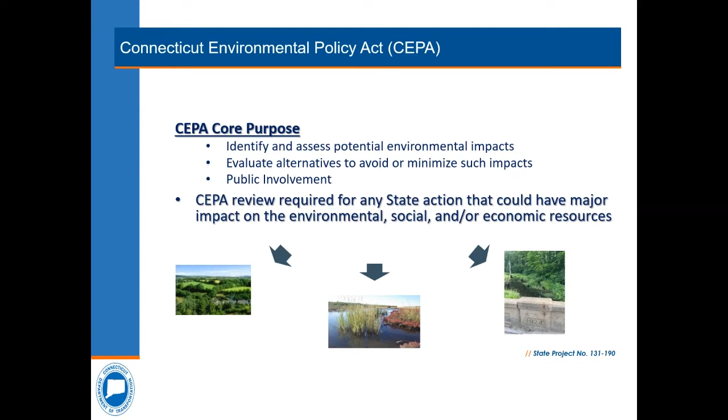Thanks, Jeff. Hi, everybody. Thank you for joining us here tonight. My name is Kevin Fleming, and I'm a transportation planner here at DOT, and I work in the Office of Environmental Planning. We're here tonight for a joint public informational/CEPA scoping meeting. What does that mean exactly? What is CEPA and what is meant by the term scoping?

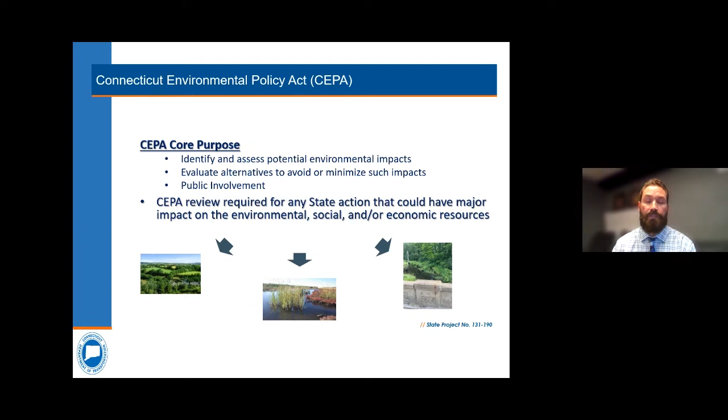Well, the Connecticut Environmental Policy Act, or CEPA, provides a process for Connecticut state agencies to follow in order to identify and review any action that may have a significant effect on the environment. At its core, the purpose of CEPA is to provide a public process to identify and assess the extent to which a proposed state action may affect the environment, and then also to evaluate any alternatives to avoid or minimize those impacts. A really important component of CEPA is the public's opportunity to review a proposed project and give feedback. So your comments and questions here tonight and then throughout the entire public comment period, which expires on June 3rd, is really vital, and it's also a critical part of the CEPA process itself.

So while conducting a review under CEPA, we have to consider the impacts that a project may have on a really wide range of environmental resources. Now, what you see here isn't necessarily an all-encompassing list, but it should give you a really good idea of the range of resources we have to consider under CEPA. Everything from cultural resources to noise to wetlands, and then also we have to make sure that the project complies with the State Plan of Conservation and Development and isn't in conflict with any of the local master plans.

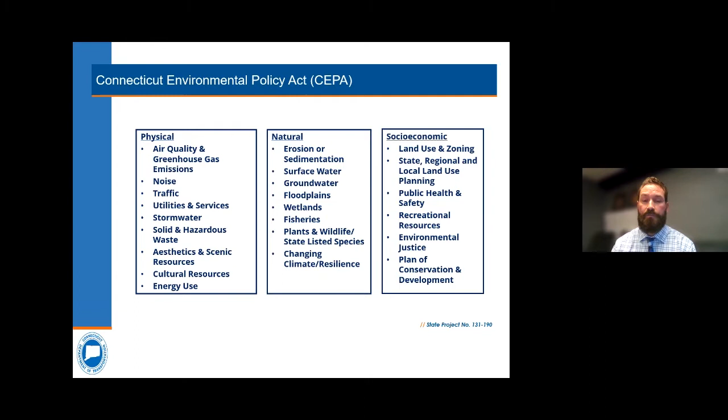And actually, in the case of this particular project, since it involves federal funding, like the majority of our projects do, we also have to look at these resources to ensure compliance with the National Environmental Policy Act, or NEPA, as well.

So now that you have a really general idea of what CEPA is and what needs to be considered under CEPA, what exactly is meant by the term scoping? Well, scoping has a really specific definition under CEPA, and the process involves a defined set of steps for public outreach. CEPA scoping is defined as the gathering and analysis of information that a state agency will use to establish the extent of environmental review of a proposed state project.

So basically, it's just a way for us to get information from the public and other state agencies so we can ultimately determine the proper level of environmental review and documentation needed for a particular project. This process begins once we publish a notice of the project in the Environmental Monitor, and that kicks off a minimum 30-day public comment period.

Now, for those of you who are not familiar with the Environmental Monitor, it is an online publication run by the Connecticut Council on Environmental Quality, and it basically tracks the projects that are required to go through the CEPA process and posts the relevant information for those projects. For this particular project, we published that notice back on May 3rd, and the comment period will run until the close of business on Friday, June 3rd.

Now, as I stated, the idea is to solicit comments from the various state regulatory agencies, such as the Connecticut Department of Energy and Environmental Protection, the Connecticut Department of Public Health, and the Connecticut State Historic Preservation Office, just to name a few, as well as from the various municipalities and the public, to help identify any potential alternatives and also to help identify any specific environmental resources that need to be analyzed in the project area.

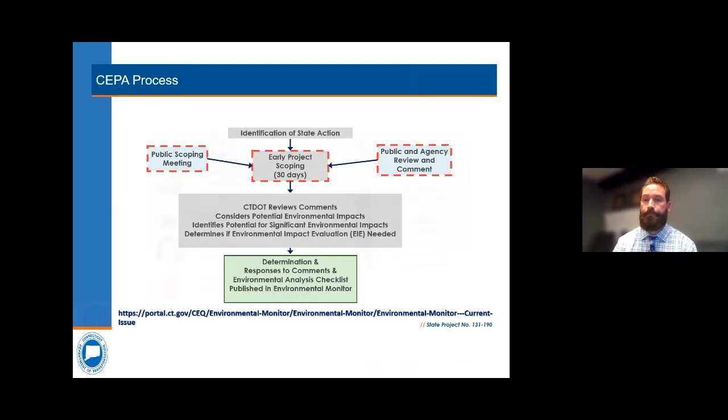All right, thank you, Kevin. I'd now like to introduce the project's design team. The Department of Transportation is represented tonight by Michael Calabrese, the Division Chief of Highway Design, Sebastian Canamella, Principal Engineer, myself, Jeff Paffinger, Project Manager, and Charles Grillo, Project Engineer.

We are joined today by the team from Fuss & O'Neill, the department's design consultant firm for the project, represented by Kristen Soloway, Project Manager, and Dan Whitmore and Stu Harris, Structural Engineers. With that, I'm going to pass this over to Kristen Soloway and her team at Fuss & O'Neill for the project presentation.

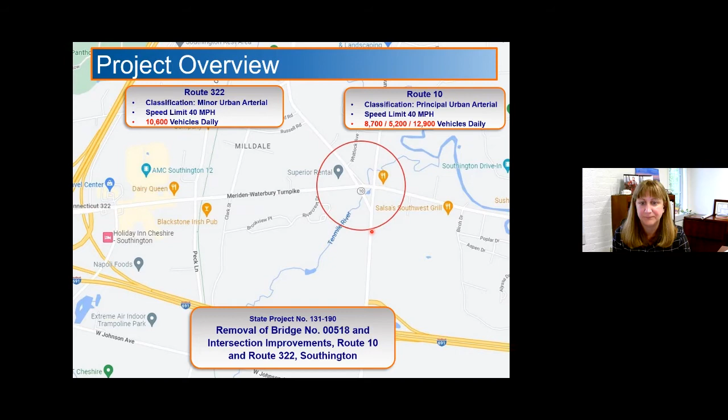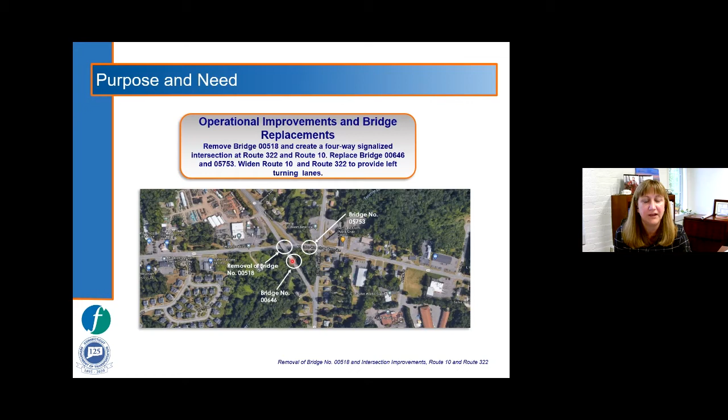The purpose and need for this project is to remove Bridge 518, which is the overpass of Route 10, and construct an at-grade four-way signalized intersection. The profile will be lowered so that Route 10 will meet 322 at its existing grade. Bridge 5753, which is Route 322 over the Tenmile River, and Bridge 646, which is Route 10 over the Tenmile River, will also be replaced.

As part of this project, we've completed a traffic study. It was determined that with the proposed improvements, an acceptable level of service will be achieved during the AM and PM peak hours.

There will be a new signalized intersection at Route 10 and Route 322. There will be full replacement of the Route 322 and Old Turnpike Road intersection, as well as the Route 10 and Old Turnpike Road intersection.

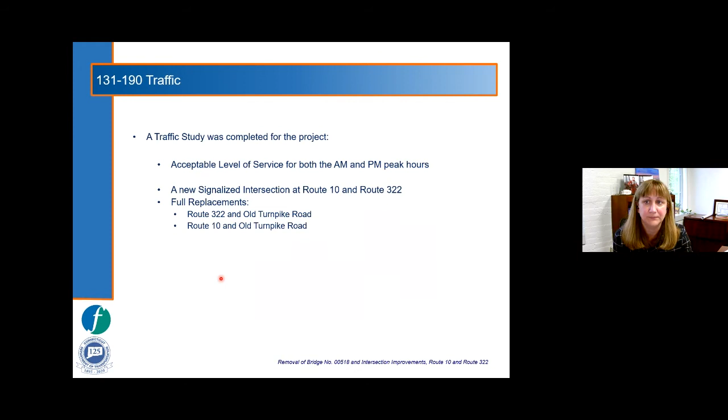Approximately 1,500 feet of Route 10 will be constructed. The roadway will be widened to provide two travel lanes, one in each direction, and left turn lanes as necessary. Route 322 will also be widened to provide one travel lane in each direction and associated turning lanes.

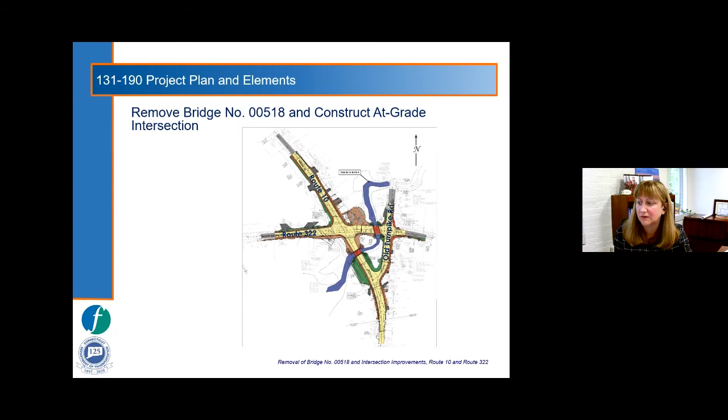Now I'm going to blow up each intersection and give a little bit more detail about what's going to happen. At the intersection of Route 10 and Route 322, as the bridge will be removed, we'll lower Route 10 to the elevation of Route 322. There will be a new signal, with full crosswalks and pedestrian facilities. As you can see, the brown shaded areas are sidewalks, along the north and south section of Route 322, as well as on Route 10.

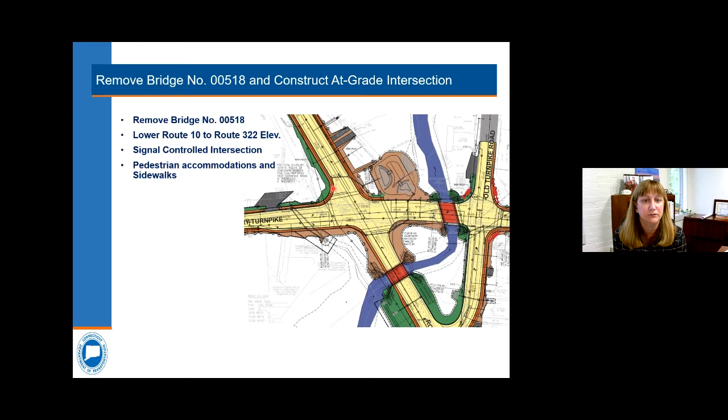As you move to the east, this is the intersection of Old Turnpike Road and Route 322. This will also have a full traffic signal replacement with sidewalks on the east side of Old Turnpike Road. The brown shaded area extends past the pavement reconstruction, as we'll be connecting to the existing sidewalk further down Route 322. We'll also be improving turning radiuses on the north and south corner to allow for smoother maneuvers for trucks.

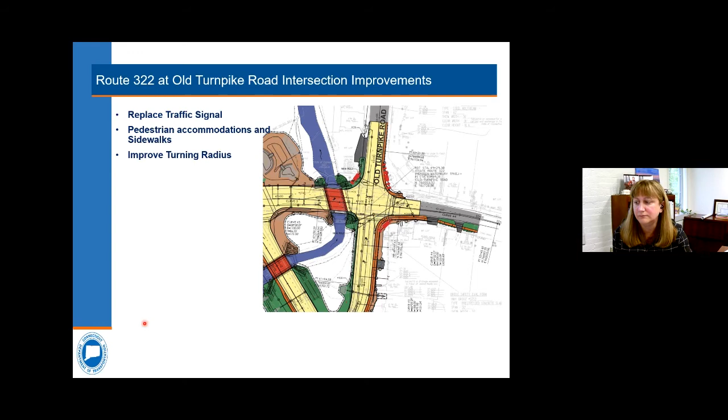This area is the new intersection of Old Turnpike Road and Route 10. This will be realigned to form a more perpendicular approach to Route 10. There will be a new traffic signal at this intersection, as well as full sidewalks that will be extended to the project terminus.

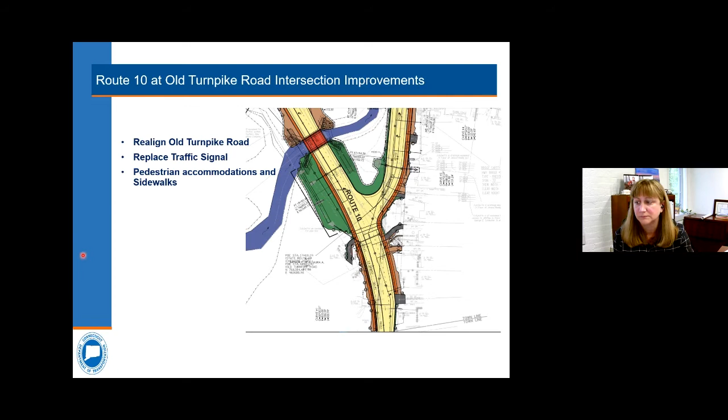This view shows an enlarged area of bridge number 646, which is Route 10 over the 10 Mile River. This is an 85-year-old arch culvert in need of replacement. It is hydraulically inadequate, and it will be widened to improve the hydraulics through the bridge. Sidewalks will be provided along Route 10 in this area as well.

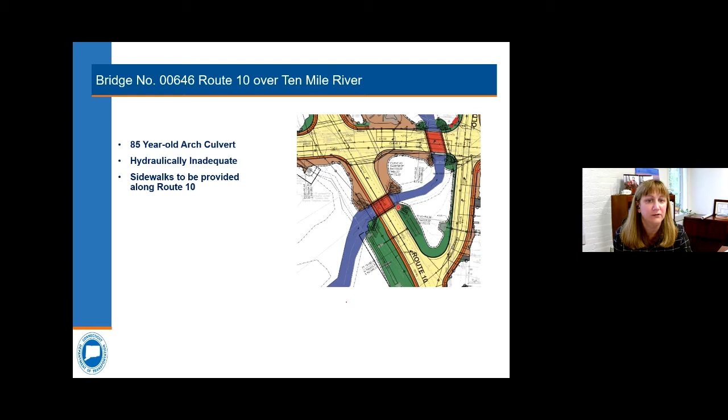And this is the bridge replacement of Route 322, bridge number 5753 over the 10 Mile River. This bridge will also be wider than it is in its existing condition to allow for shoulders as well as sidewalk.

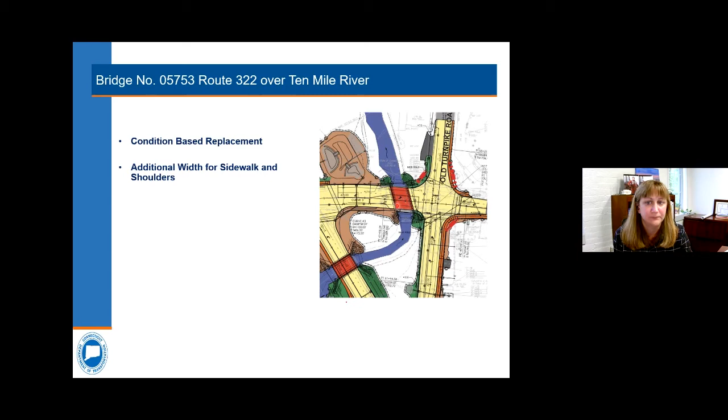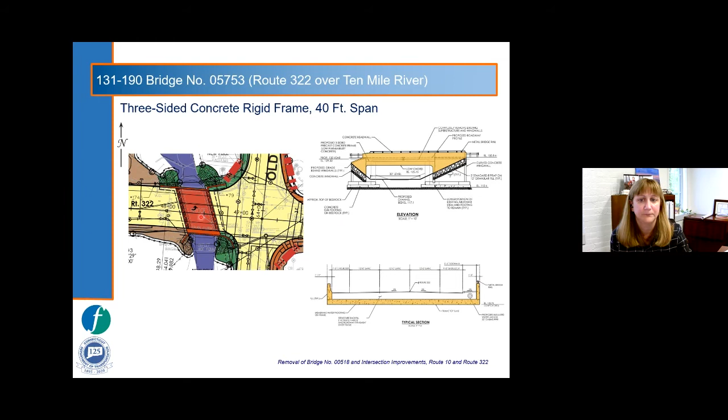And with this, I'm going to turn it over to Dan Whittemore, who's going to talk about the bridges in a little more detail. All right. Thank you, Kristen. Again, my name is Dan Whittemore. I'm a structural engineer at Fuss & O'Neill, and I want to talk a little bit about starting right here at Bridge 5753. As Kristen already said, it carries Route 322 over the 10 Mile River. This is just west of the Old Turnpike Road signal that's out there today.

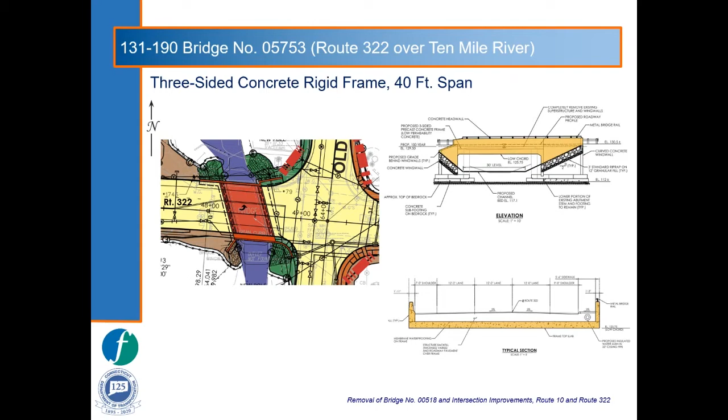The bridge out there today is proposed to be replaced with a longer three-sided precast concrete structure. These structures look like upside-down U's: just a roof and two sides, no bottom. The reason we're replacing it, there are some condition issues, as Kristen mentioned, with the existing bridge. I think more than that is the 10 Mile River. The new bridge is wider. It can allow more water to pass under it during larger storm events.

We are looking at using a three-sided precast bridge, as these bridges are constructed off-site, allowing us to basically drop a nearly finished bridge onto a foundation. We anticipate that construction of a bridge of this type will take about a month to complete. So we'll be able to get in there, get it done, and get out a lot faster.

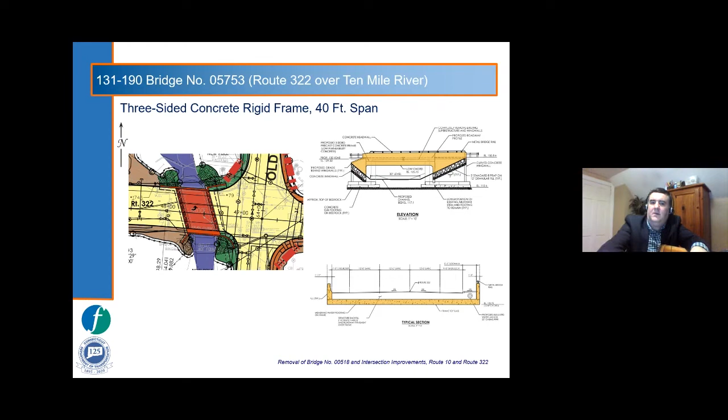When you cross over the structure, you can see the cross section in the lower right hand corner of your screen. The configuration of the sidewalk and traffic lanes will be very similar to the structure today, though the structure will be longer. And it'll be better aligned with the Old Turnpike Road intersection right to the east, which we'll talk about in a few minutes. The bridge is going to have 3 lanes of traffic, 2 shoulders, and a sidewalk on the southern side, very similar to what's out there today. Next slide, Kristen. There we go.

When you're crossing it, you're going to see a sidewalk on the west side that isn't out there today. So we're going to have sidewalk access coming off of 322 heading north and south along Cheshire Road going up to what will be Norton Street. And 3 lanes as opposed to 2. The third lane is going to be a turning lane for the intersection of 322 right north of this location.

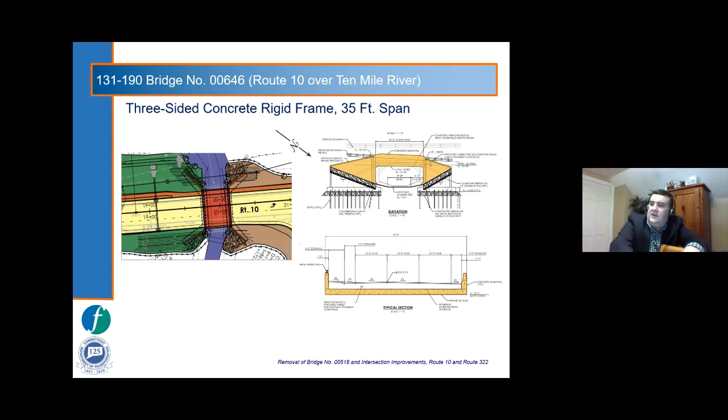All right, next slide. Take a few minutes and discuss the staging or the phases that we're going to use to get this project complete. We anticipate 6 major stages, plus a paving stage I'll talk about a little bit at the end, and I'm going to go over these stages one by one. These stages have been planned out to build on top of each other to allow the work to be completed while still allowing traffic to flow through the site. The stages build off each other, so it's important that the stage before be completed before the next stage can start, as you will see. All right, so let's talk about stage 1.

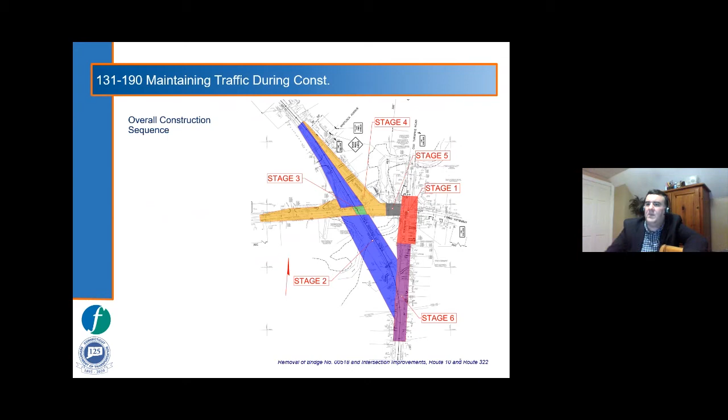Stage 1 is focused on the Route 322 Old Turnpike Road intersection. All right, so in this view here and the rest of the plans I'm going to show you, the yellow areas in the plans are work zones, so areas the contractors are working, and the gray areas are showing roads open to traffic. Stage 1 has 3 kind of smaller substages built into it, but it's all doing the same thing. What we're looking to do is basically put in the final curves and the widening that we're going to need in the future stages in order to allow the traffic to flow, as you'll see

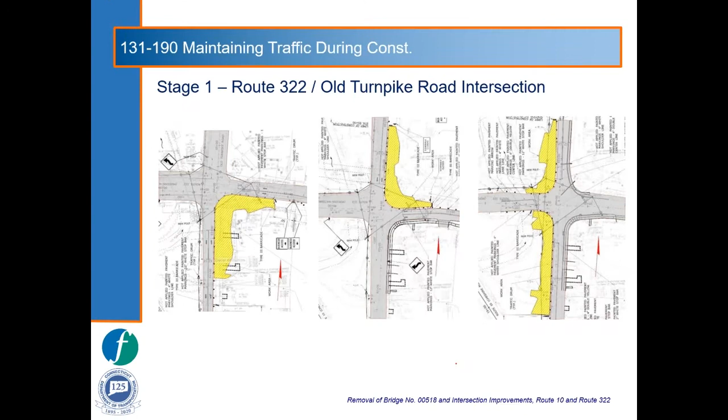as you go through this. You'll notice in this and all the future stages we're going to look at, we're allowing at least 1 lane of traffic in each direction. And if we can't allow for at least 1 lane of traffic, we're going to show a detour around the site. Okay, and one more thing that isn't really shown on these plan views, if your home or business is behind one of these yellow areas, it's our design goal to assure that traffic can get through the construction zones onto the driveways and access the businesses. We're never going to block off the homes because of the work we're doing here. Let's go on to stage 2.

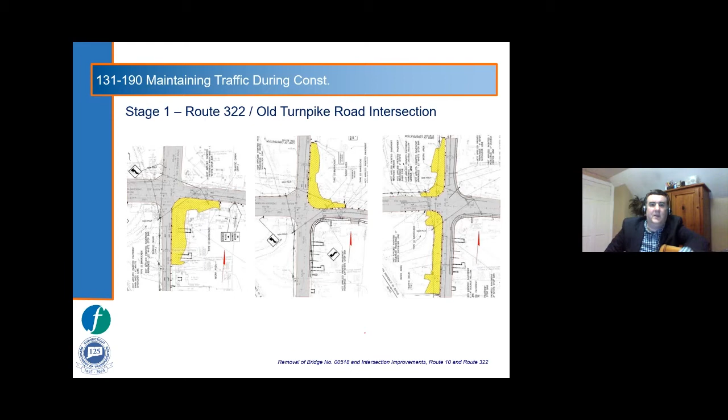All right, in stage 2, what we're looking at doing here is lowering Route 10. So in this stage, Route 10 is closed. So north-south traffic is going to go up Old Turnpike Road, turn left onto Route 322, which is why in stage 1 we were improving the curves on the intersection, and then heading north up Norton Street.

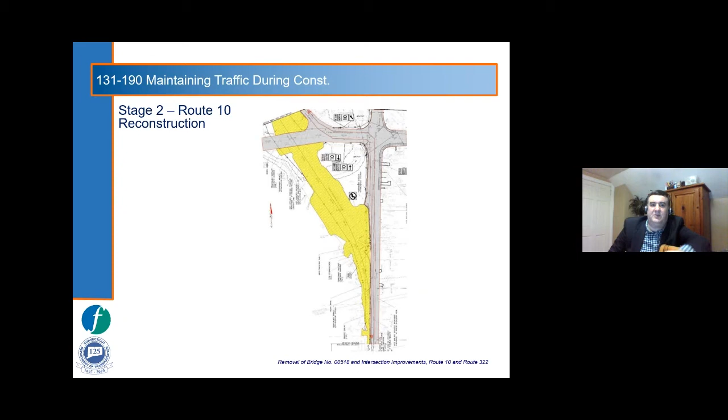The existing bridge overpass where Route 10 crosses over 322 is not included in this phase. That's going to be in the next phase, so traffic will be able to pass east and west through there. And while it isn't really called out on this plan view, in the yellow zone there is where Bridge 646 is situated. That bridge is going to be replaced during stage 2. Go ahead and flip over to next stage.

All right, so stage 3, we have one goal in stage 3, and that is to remove the bridge, the Route 10 bridge crossing over 322. During this stage, traffic will remain closed both on Route 10 and on Route 322. So talking about traffic flow, obviously you can't allow for 1 lane of traffic in each direction. North-south traffic is going to be similar to the prior stage, turning left on 322, then north up Norton Street around the project site.

East-west traffic is going to get diverted. It will be detoured north up Norton Street, over to Clark Street, and then back down to 322. This phase is actually going to go fairly quickly. We're anticipating the demolition time could be as fast as around a week for us to get in there, get the bridge out, and then get 322 reopened to east-west traffic.

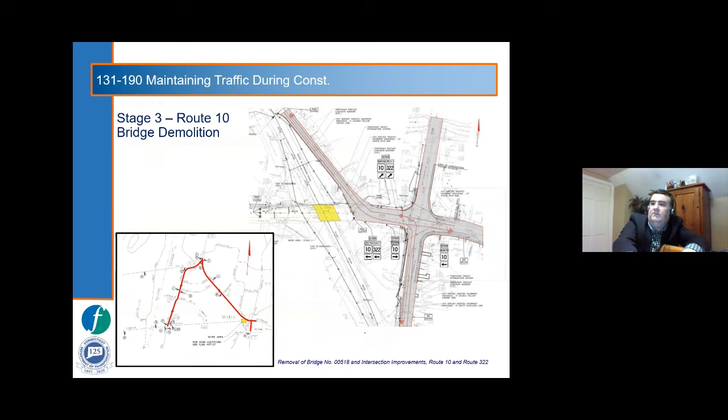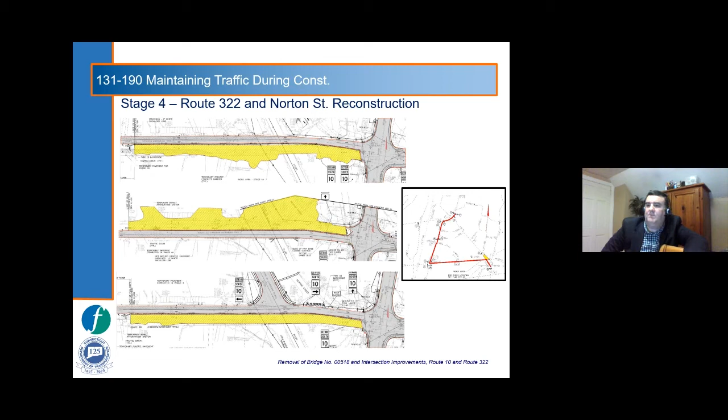The center phase right there, I want to mention, we are actually blocking off our new Route 10 interchange. So in order to accommodate north-south traffic in that phase, there's going to have to be a detour up to Norton Street and then west over to Clark Street to get around the site. All right, going on to stage 5.

To accommodate the right-hand turns off of Old Turnpike Road onto Route 10 that isn't currently supported by the intersection. There's no reason a car would make that turn. They go down 322. We anticipate, again, like I said before, the bridge can be replaced in approximately a month's time.

Stage 6, the next phase after this. This is basically the wrap-up phase. At this phase here, we are widening out and reconstructing Old Turnpike Road south of the intersection where it meets up with Route 10. While that will be closed, again, north-south can be accommodated through the new Route 10 interchange, and access to the local businesses can happen from the interchange to the north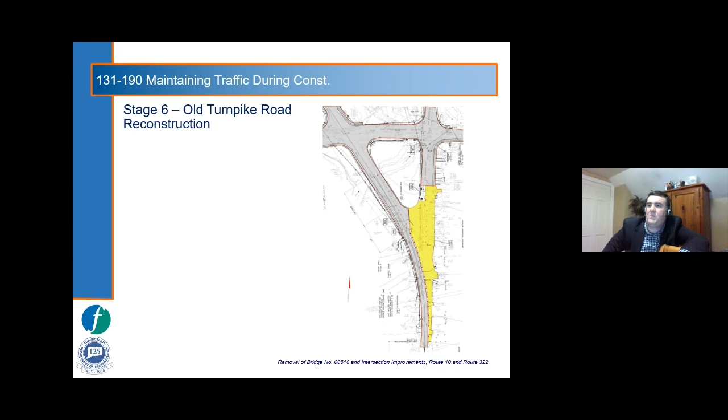up on Route 10. And then there's a final phase, stage 7, after all of this, final paving. In all the prior stages, the bituminous that we're putting down on the roadway won't be the final full thickness. We're going to basically add that in stage 7. We wait until the very end, just so that the project has a consistent layer of bituminous across the entire thing, and also helps to cover up things that we use during stage construction. Could be temporary pavement markings, things like that will be covered up by the bituminous layers. Paving work will happen behind short-term construction patterns and be fairly innocuous.

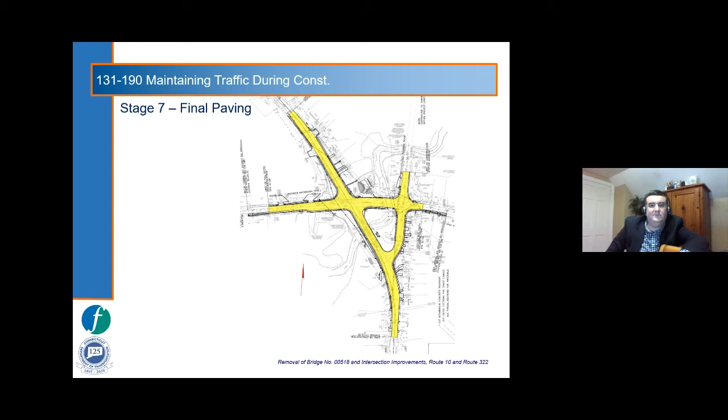There will be utility relocations within the project area. There will be no disruptions to service. Overhead, there will be some pole relocations as necessary to relocate power, telephone, and cable. Underground, there is sewer, water, and gas. Relocations will be to avoid drainage and profile adjustments, and frame and covers will be adjusted as necessary.

Coordination with the appropriate regulatory agencies is ongoing. At this stage, we anticipate the following permits. From the Connecticut Department of Energy and Environmental Protection, an individual flood management certification, an inland wetlands permit, and a stormwater discharge permit. From the U.S. Army Corps of Engineers, there will be a requirement of a pre-construction notice.